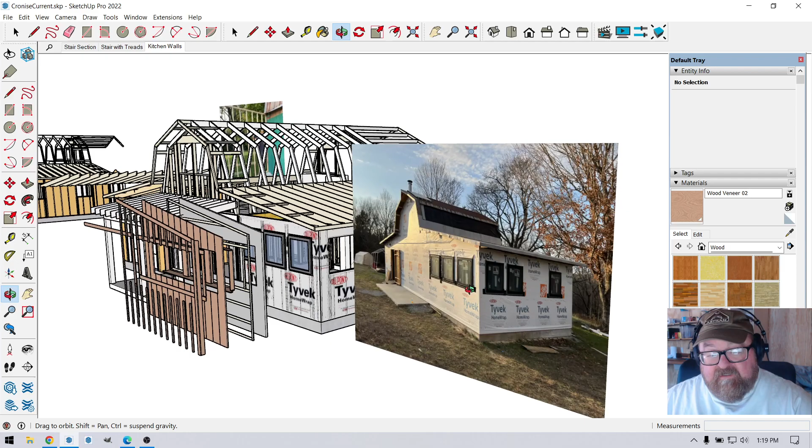So this is going to be rather short. I know what you're thinking - a short SketchUp video by Artisan Tony? How can it be?

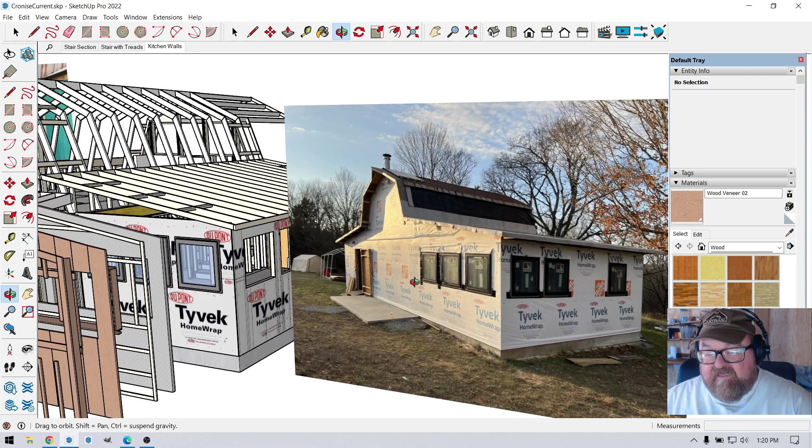Well, I was talking to my good friend Ray Cronise this morning about he and his son Danner's project, where they're converting this shed into a tiny home. It's not really that tiny - when they get done, it's going to be probably 2 or 3 times bigger than most tiny homes.

But anyway, he's just got these windows in, and I had helped him with the framing of those. You can see here, right here - get down in there, yeah.

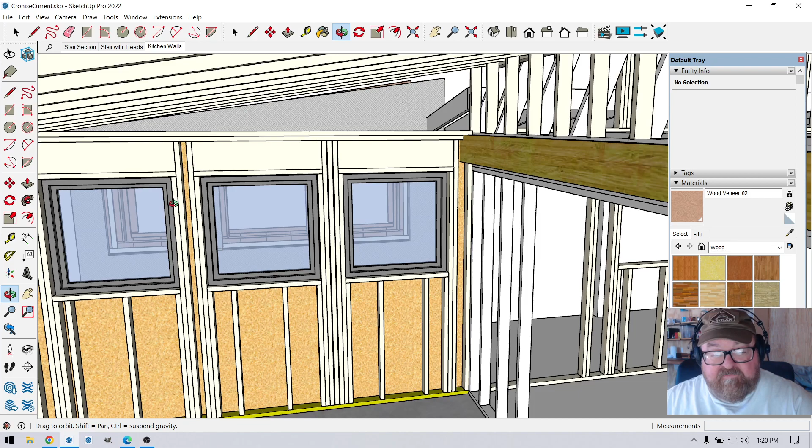The first phase of this sort of help was just to get the framing all worked out. Looks like there's a stud there - I was trying to figure out why there's a gap there and a stud there. This stud probably could have been left out. This one, I didn't catch that till just now. That one didn't have to be there.

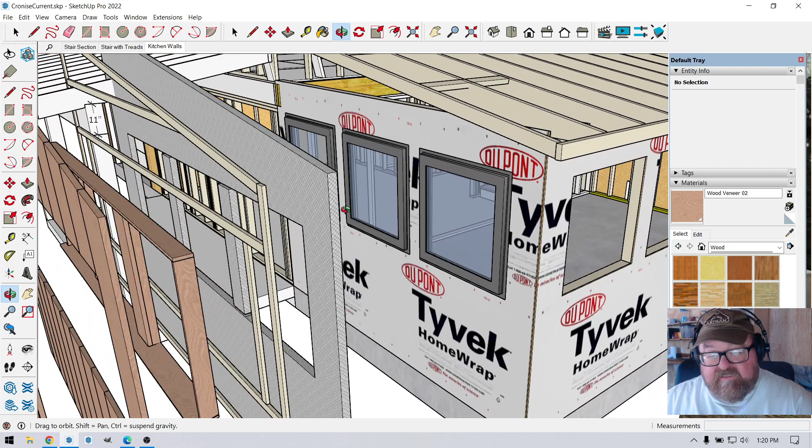Revisions. So anyway, they've got the windows in, and what he's going to do is use this Rockwool insulation - I'm just trying to show it like this. And it goes on the exterior of the wall. He wants to be warm in the winter and cool in the summer, so he's putting more insulation on the outside. I'm just kind of kidding around.

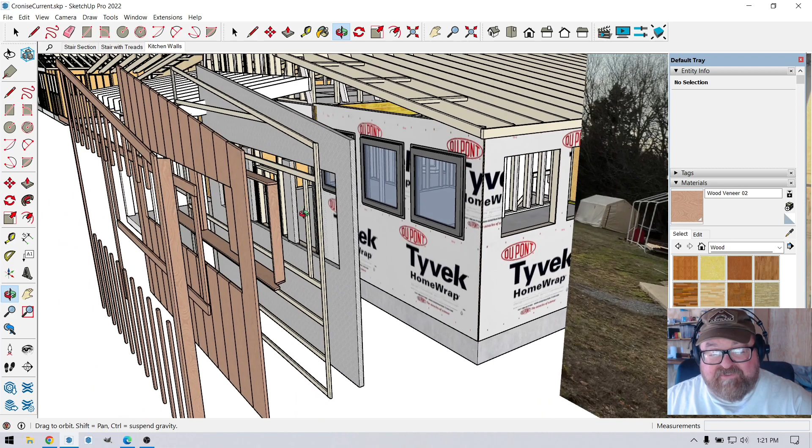Some people obviously are doing this as added insulation benefit. But anyway, what it does is it creates these little challenges for your trim work - the siding, trim, drainage, and all that.

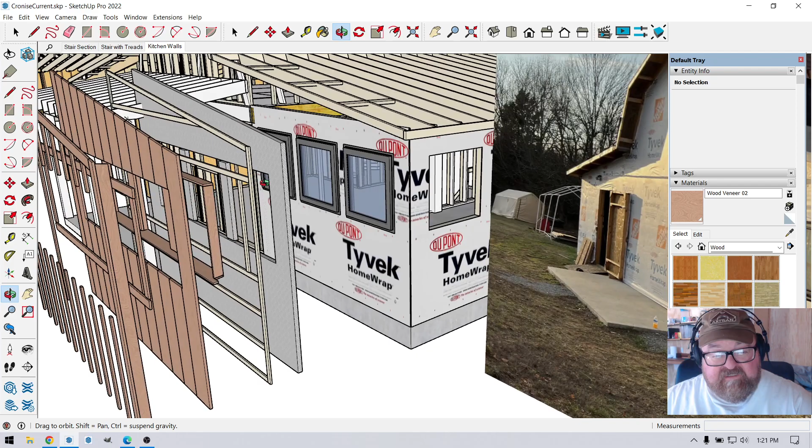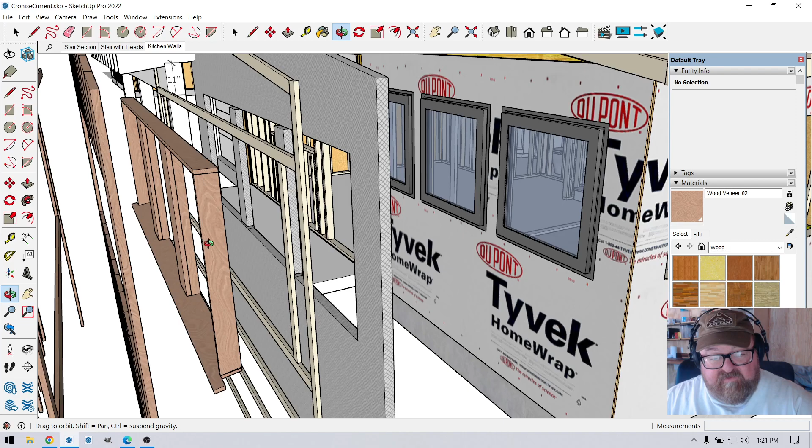So I created this little animation to show how I would do it, and these are basically the layers - I'll talk about them right quick. This is the Rockwool, it goes on first, then the furring strips go on next, and then this is really what I want to talk about - this trim box that would go in, and then the siding, and then this trim, and then the battens.

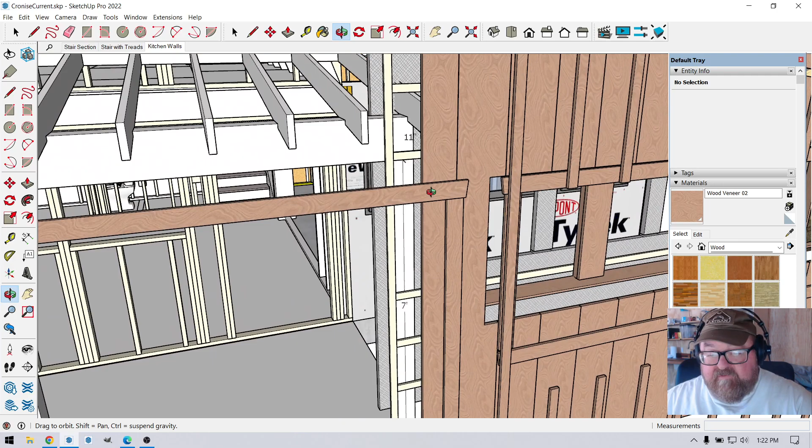This part over here is kind of weird because this is where the door would be - there's going to be a door right here, and there would be a similar situation right here.

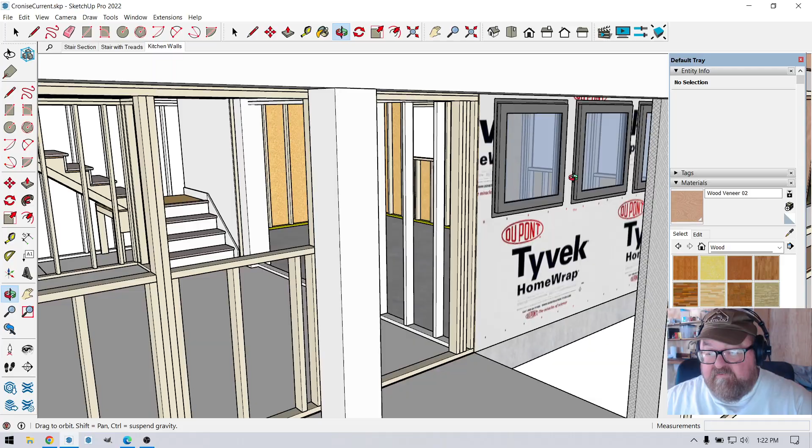Okay, so this is the one I was talking to him about this morning. I got myself confused - I thought we had done the windows like this, where we just put 3 inches between them, but it was more of a space over here. So that was my confusion this morning when I was talking to Ray on the phone.

So I'm going to play this short animation - it's real quick, and we'll see if I just play it here.

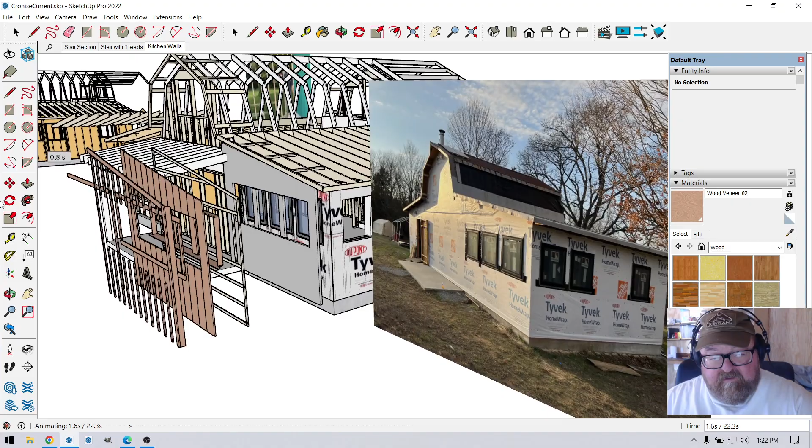There goes the Rockwool, the furring strips, that trim box - I want to talk about that for a second - those trim, the siding, board and batten siding, the trim, and then the battens.

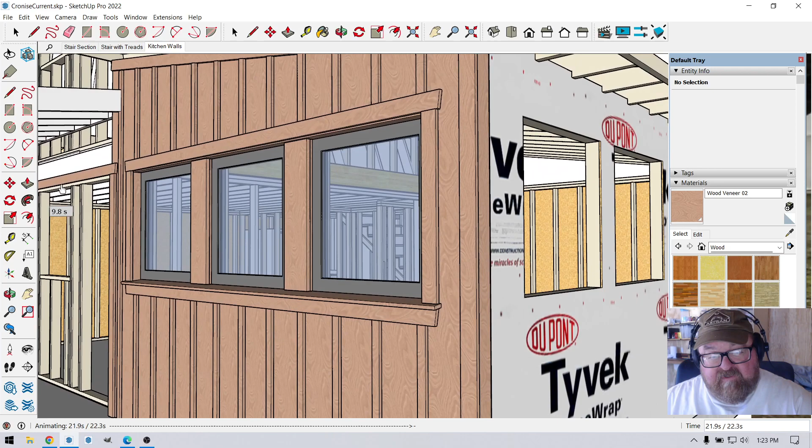And then, the reason I'm making this video is because - let's see if I can exit to SketchUp for a second. Back to Animator, let's put you over here somewhere.

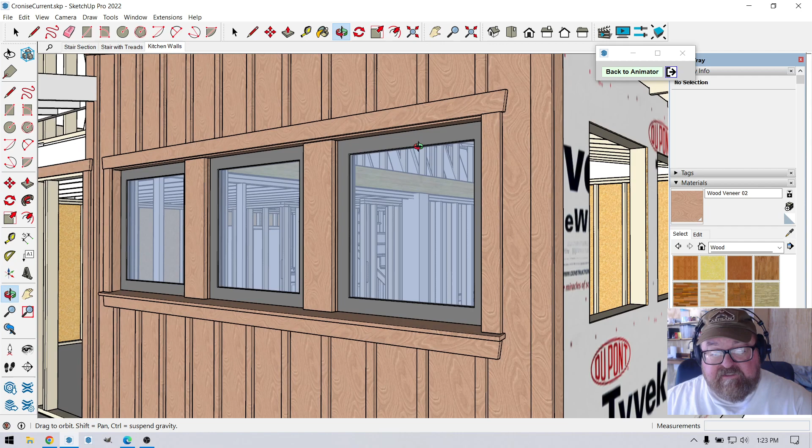I like this look of the windows being as a unit. I think what Ray had in mind was that he was going to trim out the windows individually, but I really like this way, and I'll show you why.

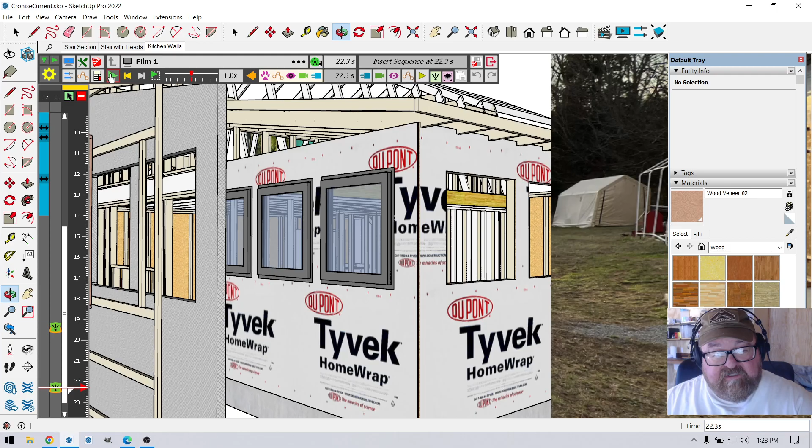If we can go, let's see - I guess I can pause the animation. Let's go back to Animator, and we'll pause it right where I want to pause it.

So there goes the Rockwool insulation, and I want to make a point right here before we go any further. This is kind of the key right here - you would leave 3/4 of an inch or 1 inch, whatever thickness your trim is, all the way around the window, with a gap through there.

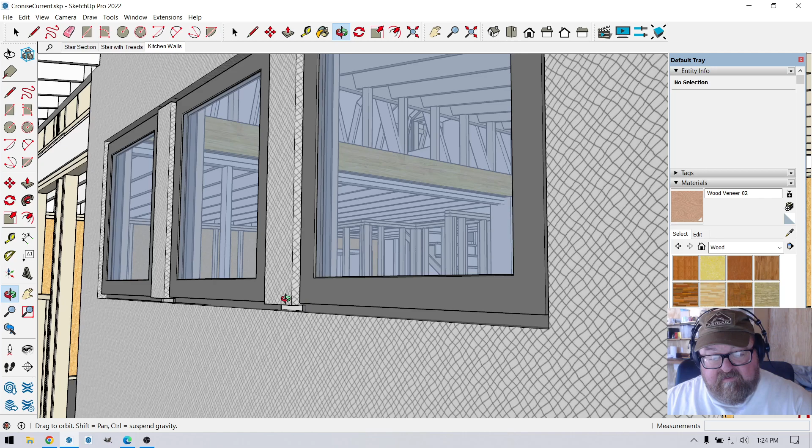Now let's go back and continue to play this - there goes the furring strips, and let's stop it right here. This is what I mean.

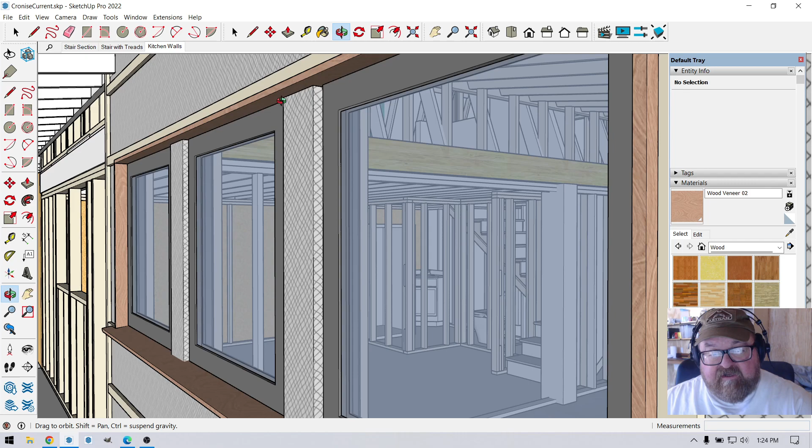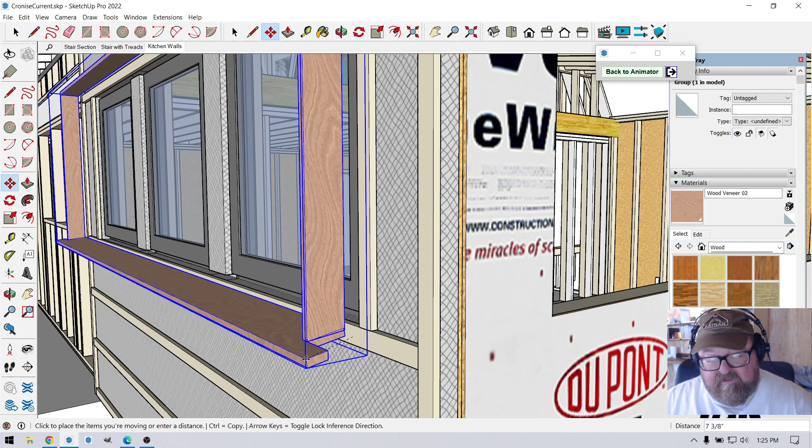Yes, I don't think I fixed this sill completely, but what it would do - yeah, it needs to be straightened out here. You would slope the bottom of this.

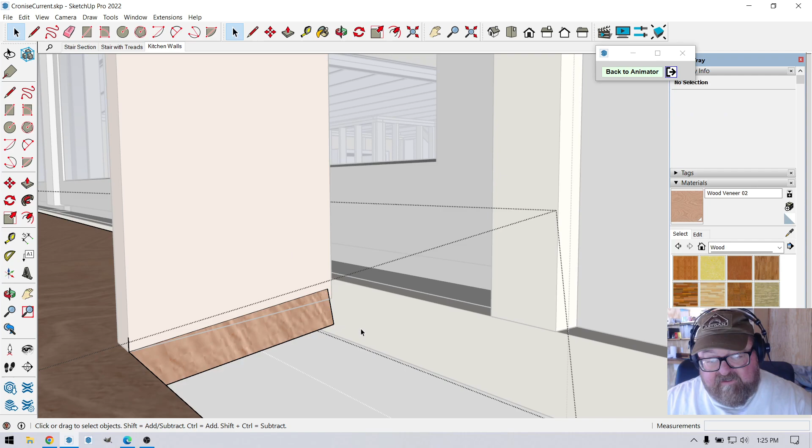Let's see, first we would - let's see, anyway, I'll clean this up later. I did this while I couldn't see it - it was inside the wall when I did that part. But the point is, this piece would be up here.

You'd cut a slope on it. Okay, I thought I selected that piece. This is what I didn't want to do - get into a lot of detail in a shorter video. But I'm going to try to raise that up and lock it - there we go.

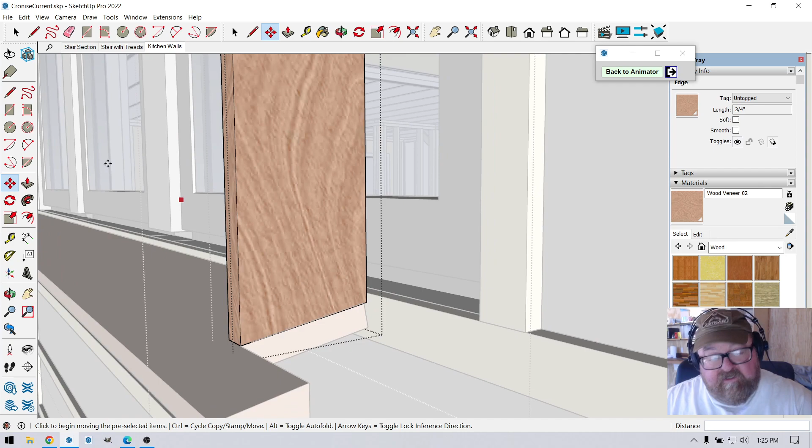So what you would do is, and then this one - can I grab that? Just that one. It would be cut on the slope too.

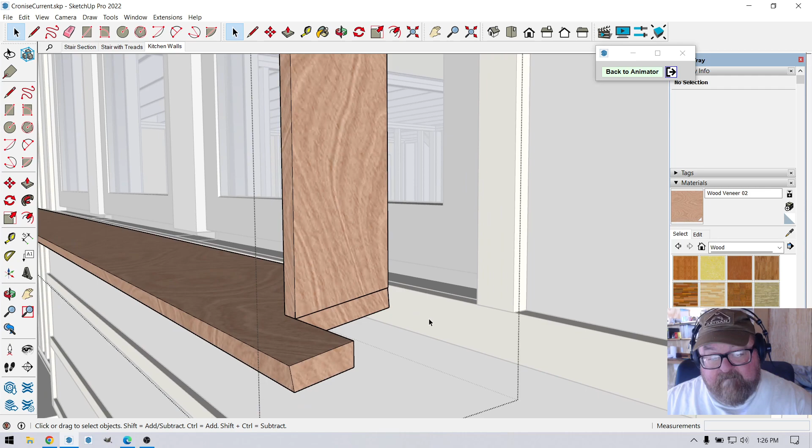Okay, because this would be going against the Rockwool insulation. Well, actually, it's going to be going against your window flanges with tape around it. So you would build this box thick enough to have it come out to your siding, to the face of your board and batten siding, so that your trim could rest on it.

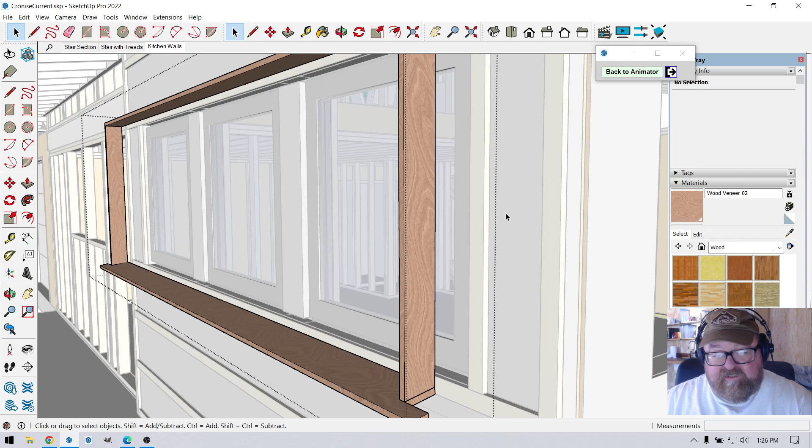Okay, and you can see here, it's just one long board across the bottom. It's tilted at about 10 to 15 degrees, and it's real simple. You could build this box and put it in there, and use like a Kreg pocket hole tool to screw it into the wall. Real easy. I wonder if I can play this.

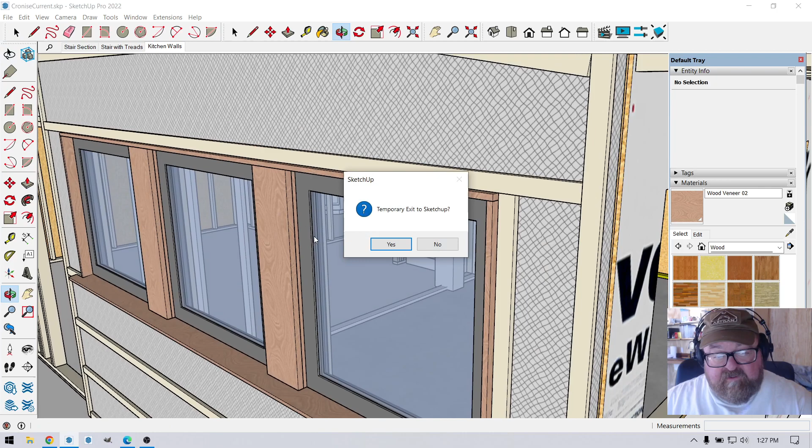Okay, yeah. Okay, let's stop right there. Now, after that box is in, I'm calling it a box, but it's just the trim band. This right here would give the look of it all being one unit. This is the key right here, it's one of the keys here. Let's see if I can pull this straight out. All it is,

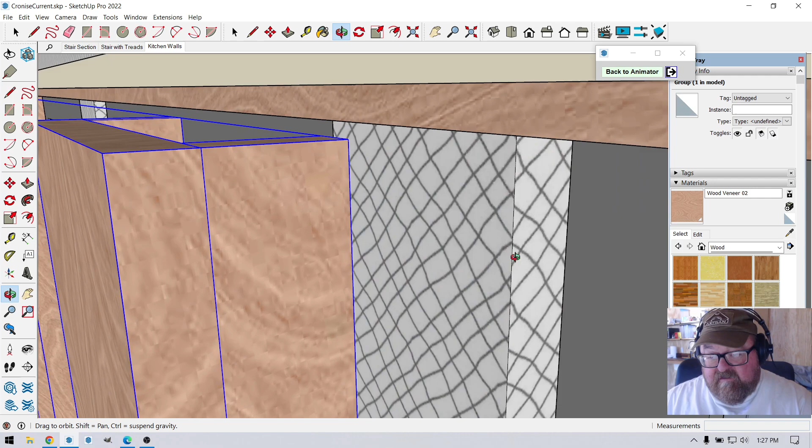another little box you're going to build that wraps that Rockwool insulation. Okay, just like that. And what that's going to do is it's going to be back closer to the plane of the windows, and it's going to make the windows all look like one unit.

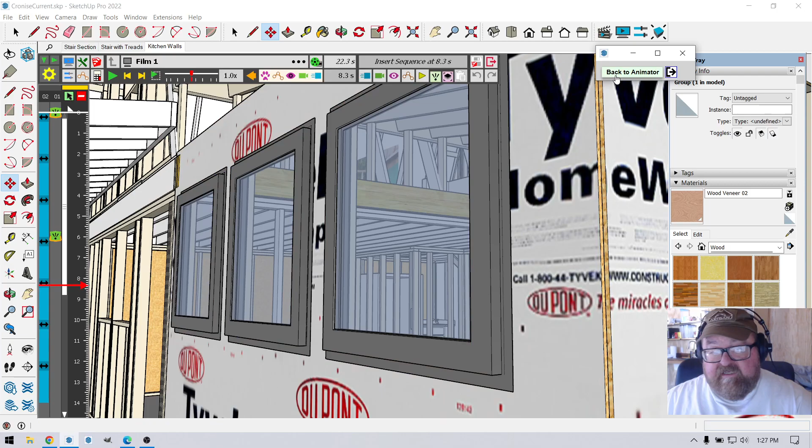Okay, now let's go back. We'll see where we are. Back to animator, play, and then you got your board and batten siding, and then you can see your trim. That box that we built earlier comes out, and you can either leave a reveal. I like to leave a little reveal right here.

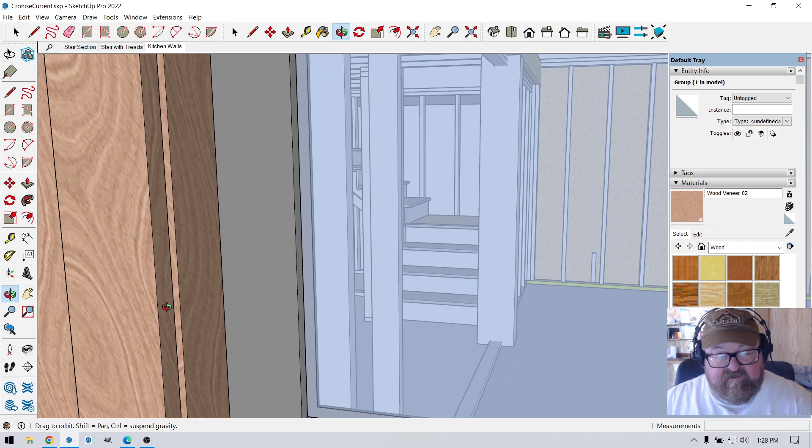I don't like making it all flush. I would across the top too. Looks like I got a bigger reveal across the top for some reason, but that's usually about 1/4 of an inch. And then if you want to seal it, it gives you a place to caulk it too. Of course, you want to caulk this really good up here. The only thing I'm hoping is that there's enough overhang to protect it.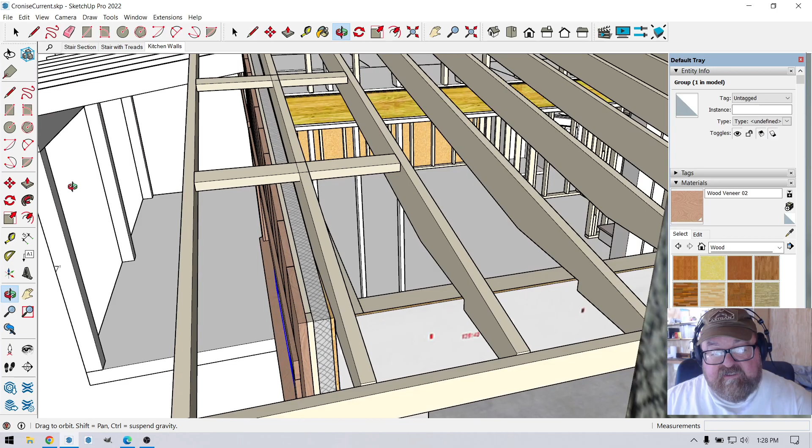The thing about this is that everything behind the siding system is sealed so good with the Tyvek and the tape that it's not going to leak. It ain't going to leak. So let's go back here, and then we put our batten strips on.

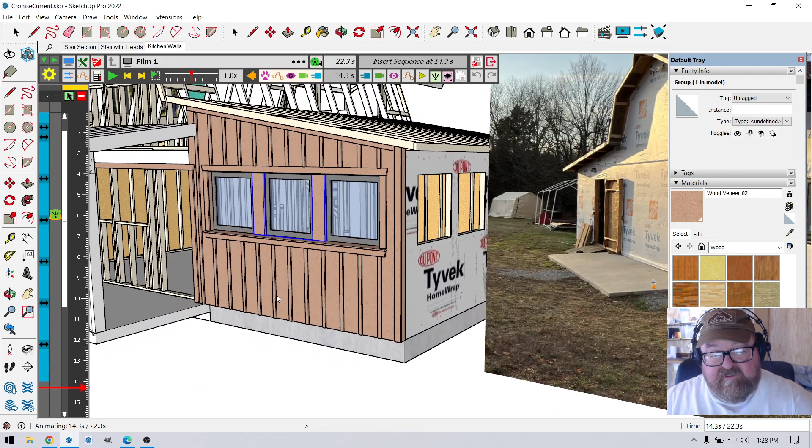Yeah, I think that was it. Then I was just trying to zoom in to show that view of how the windows all look like one unit.

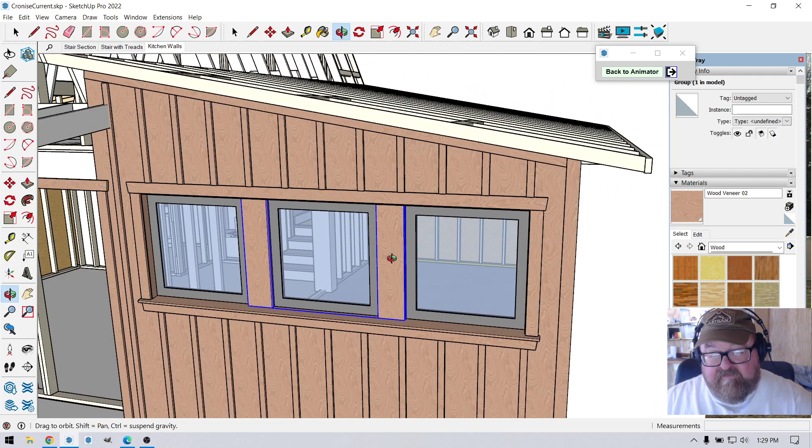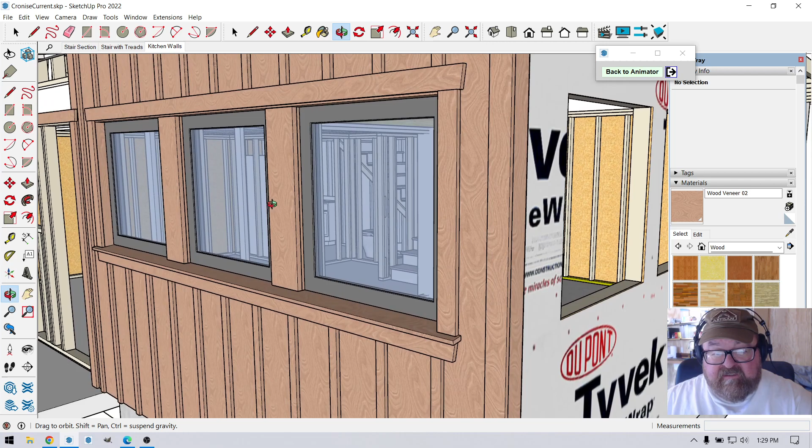Now, if I had time, I may do this later. I may show this where my main thing against trying to trim out the windows independently is that you're going to have, imagine 2 pieces here, back to back, and they're going to be real close together. It's going to be kind of junky looking. This is a really elegant way. I don't mean elegant that it's not going to be rustic, because you're going to be using a siding system that's rustic itself.

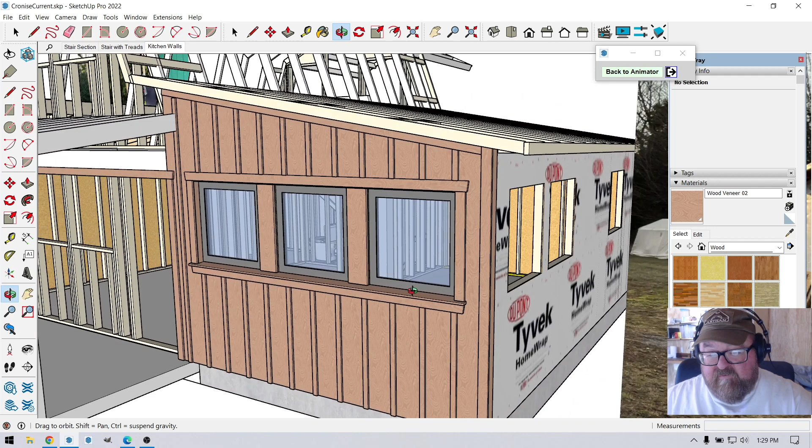And so anyway, that's what I was talking about. I may do one that shows the windows trimmed out individually. But anywhere you have these windows grouped together, like these two, I would do the same thing. You just have one of these. And is my cursor showing this time?

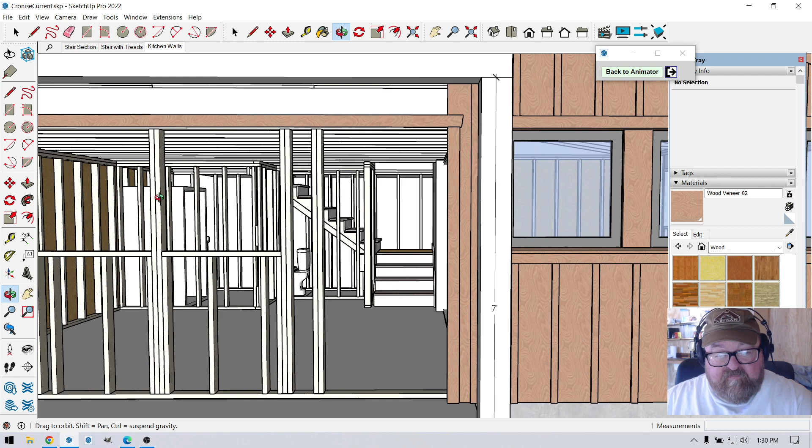Yeah, last time I did a video, I accidentally had my cursor turned off and I was pointing at things. And then the question becomes, maybe this door, no, the door and these two windows would all be done together too. You see, that would be kind of cool to have them all one. In other words, the trim piece would go all the way across the top, and I could show that too if you're interested, Ray.

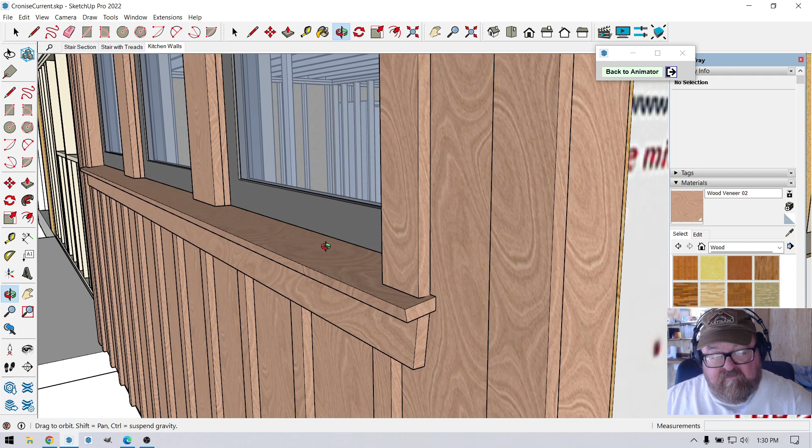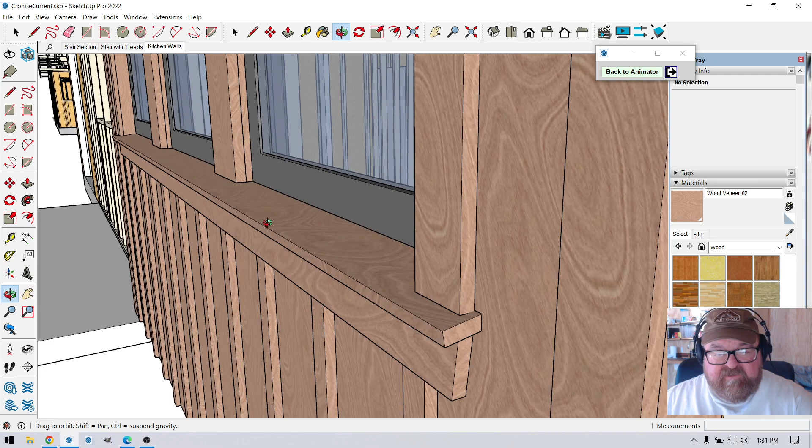So anyway, I guess people might be worried about this. I might use some kind of Ipe or Cumaru if you're worried about this rotting. It's an easy piece. The way I'm doing it, it would be an easy piece to replace 50 years from now if it ever rotted. But if it was a concern, you could use some tiger wood or some sort of exotic South American hardwood that's not ever going to rot. You could use it there.

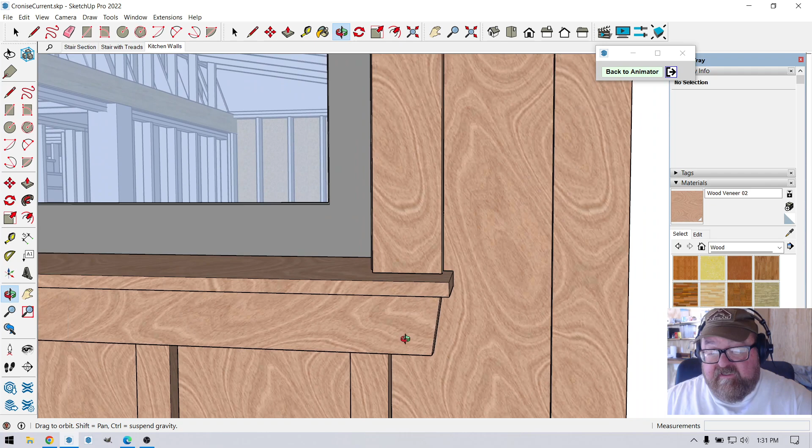And it basically just notches around, comes out, notches around, and typically we would leave it hanging over like this a little bit and have a little dog ear on the trim underneath it, but obviously that's just whatever. I've noticed that these little details add a whole lot to the overall effect.

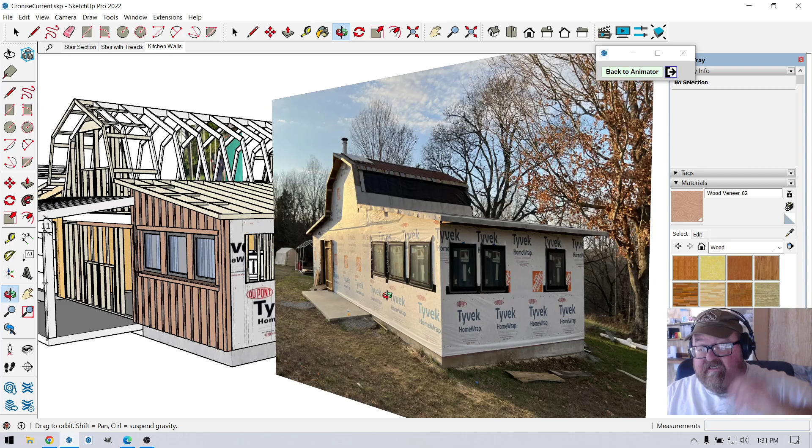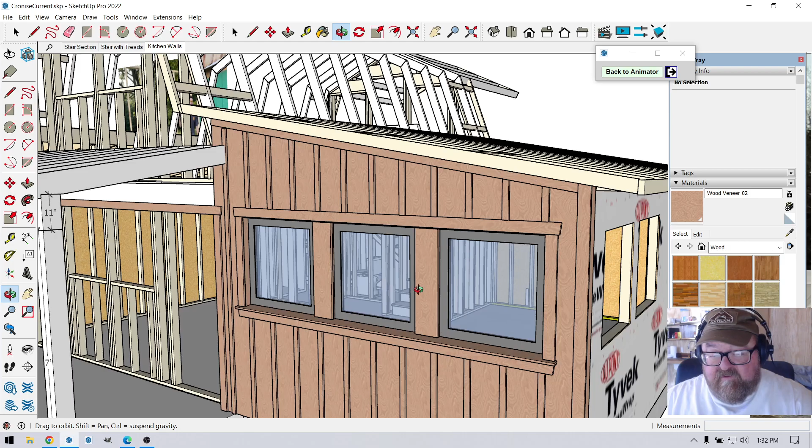I think this window here is going to be a better example of what I'm talking about, where maybe they're too close together, especially this one. These are going to be too close together to put independent trim around each window where they're close together. So maybe we'll see.

We'll see if I can convince him. He's kind of stubborn, I'm just kidding. He likes Matt Risinger or whatever his name is. So we'll just have to see how Matt does it and go from there. Anyway, just kidding around, guys.